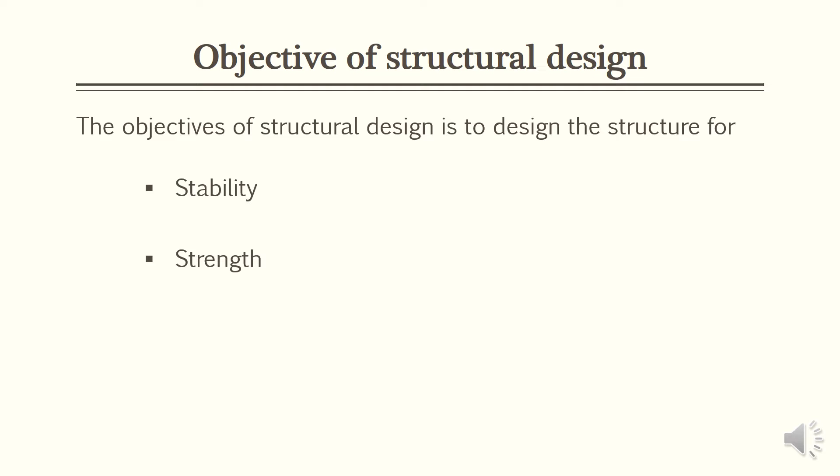The objective of structural design is the design of structure for stability, strength, serviceability, and finally economy. The design of structure should satisfy these four requirements.

Stability prevents the overturning, sliding or buckling of the structure under the action of external loading. Strength is the ability to resist the stresses induced by the load in various structural members.

Serviceability is satisfactory performance under service load conditions, which implies providing adequate stiffness and reinforcement to contain the crack width and vibration within acceptable limits. It also provides impermeability and durability.

Finally, economy - it is indeed a challenge and a responsibility for the structural designer to design a structure that not only has a good appearance but also strikes the right balance between safety and economy.

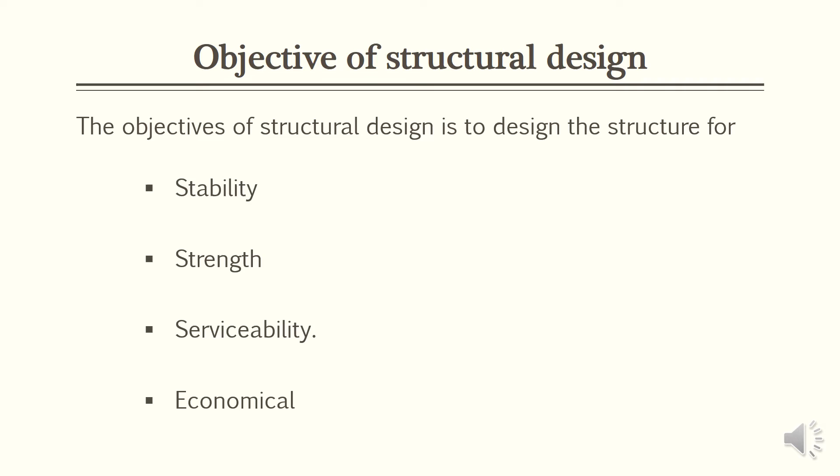Steps involved in RCC structural design process. The entire process of structural planning and design requires not only imagination and conceptual thinking, but also sound knowledge of practice and practical application.

Design of any structure is categorized into two main types. The first one is functional design, the second one is structural design. We have to see the functional design and structural design briefly.

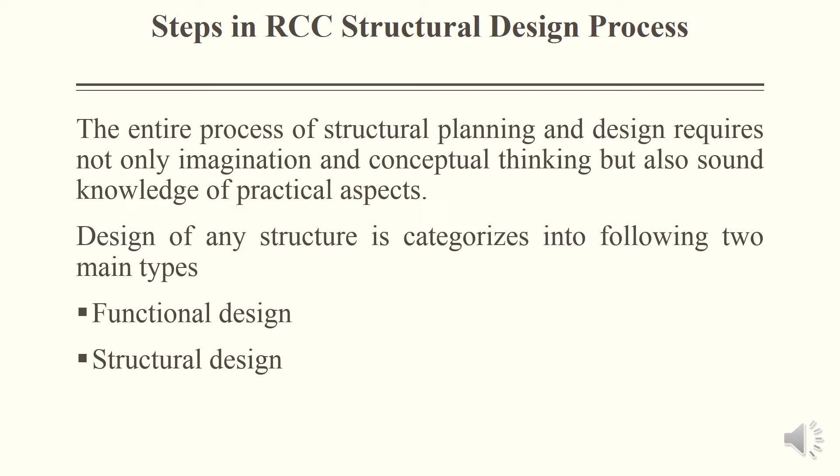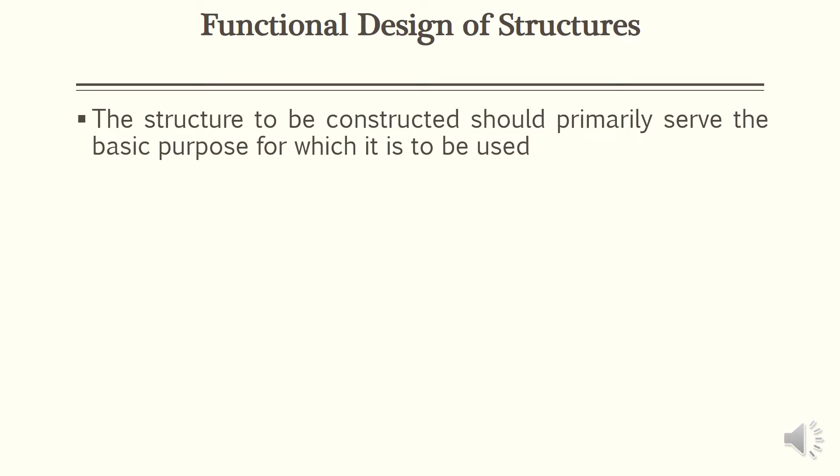The functional requirement of design of structures: the structure should be constructed to serve the basic purpose for which it is to be used. It should have a pleasing look, and a happy environment inside as well as outside.

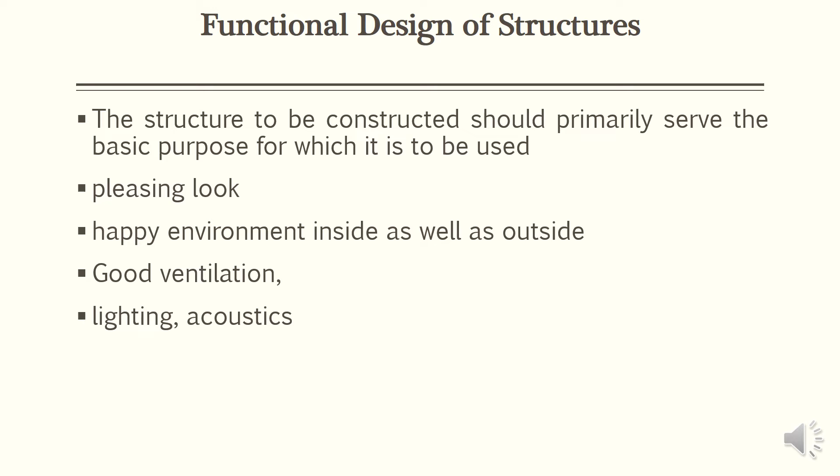It has good ventilation property. Lighting and acoustics should be provided in a proper manner. For community halls as well as cinema theatres, it should have an unobstructed view. These are the basic functional requirements of the structure.

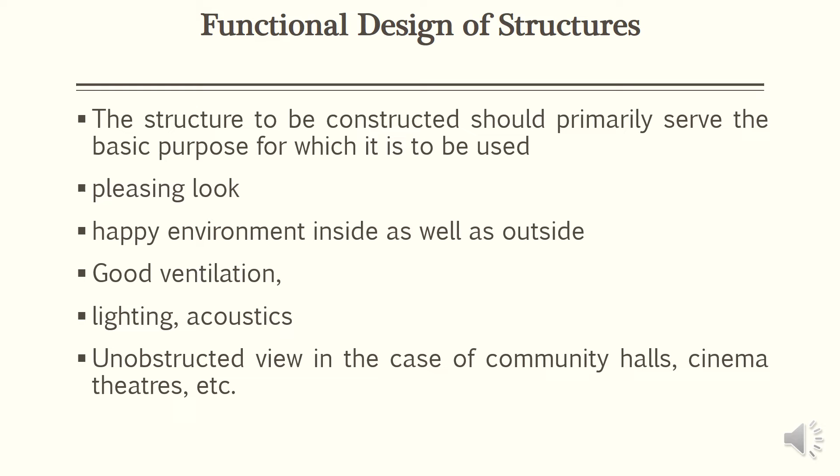Structural design is an art and science of understanding the behavior of structural members subjected to loads and designing them with economy and elegance to give a safe, serviceable and durable structure.

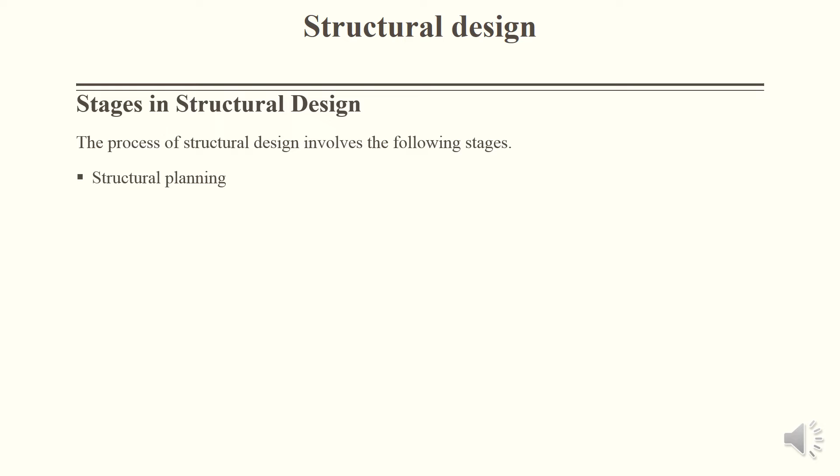The stages of structural design. The process of structural design involves the following stages. First one is the structural planning.

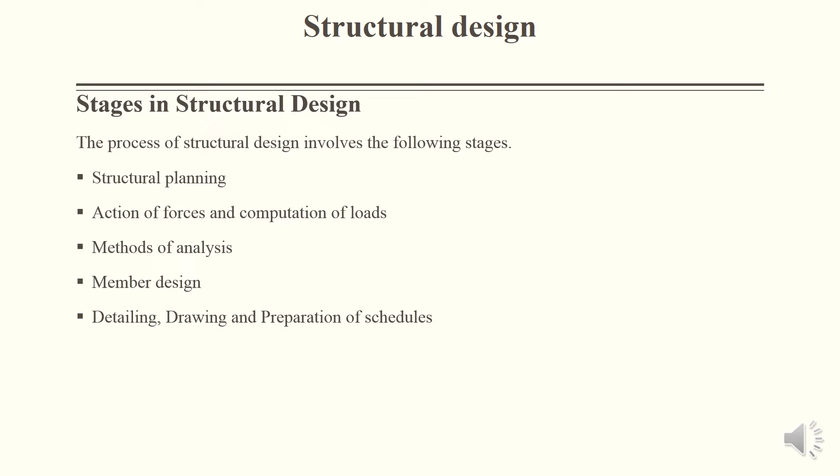Second is the action of forces and computation of loads. Third is method of analysis. Fourth one is design of members. Finally, detailing, drawing and preparation of schedules.

The types of load on structure and loading combination. Indian Standard Code IS 875 1987, Part 1, Part 2, Part 3 and Part 4 - the minimum design load for building and other structures - specify various design loads for a building and the structures.

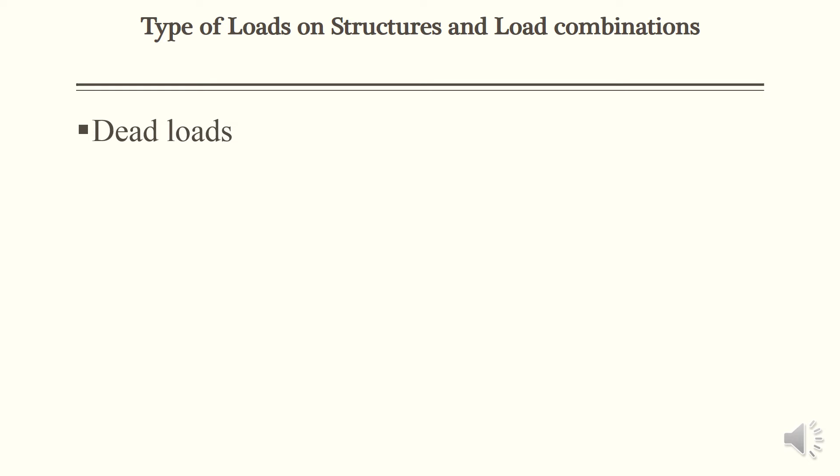The types of load acting on the structures are dead load or the self weight of the member, imposed load or live load, wind load, snow load, earthquake load and special load. These are the loads that normally act on any structure.

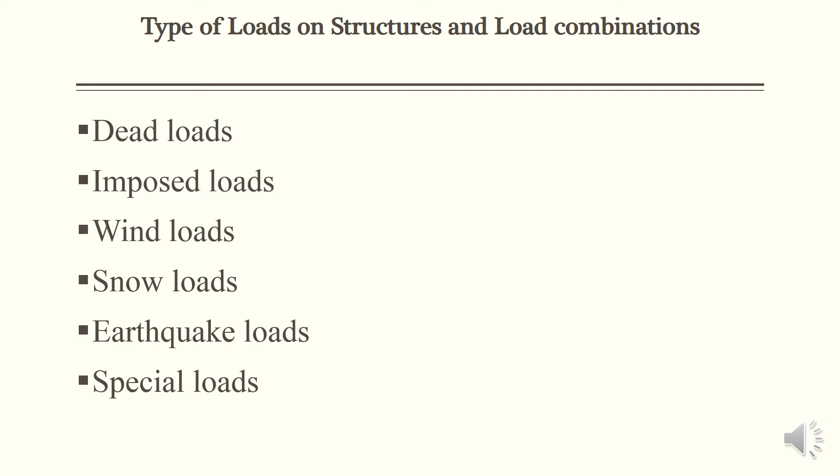Let us discuss the loading one by one. First one is the dead load. The first vertical load that is considered is dead load. Dead loads are permanent loads which are transferred to the structure throughout the lifespan.

The calculation of dead load of each structure is done by the volume of each section multiplied by the unit weight. The unit weight of common materials is presented in the table.

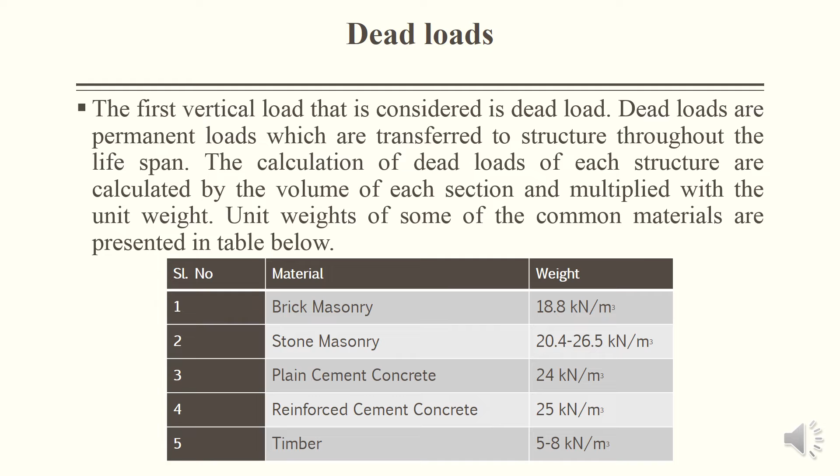For brick masonry, the weight is 18.8 kilonewton per meter cube. For stone masonry, it is 20.4 to 26.5 kilonewton per meter cube. For plain cement concrete, it is 24 kilonewton per meter cube. For reinforced concrete, 25 kilonewton per meter cube. Timber has a weight of 5 to 8 kilonewton per meter cube.

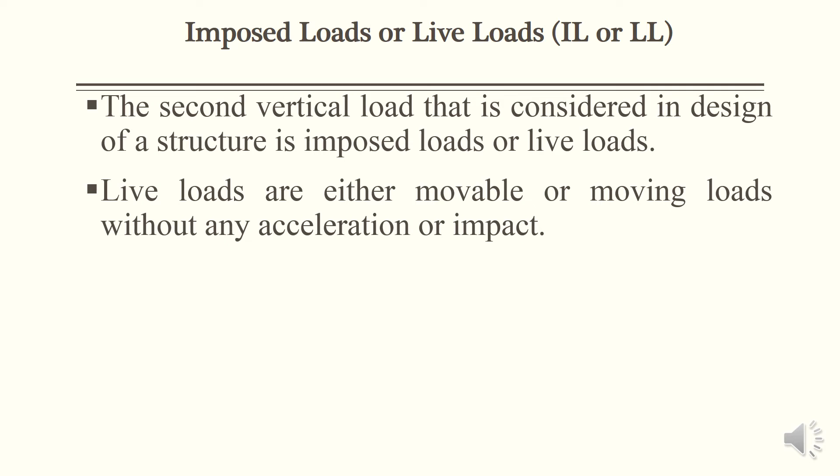Next is live load or imposed load. The second vertical load considered in design of structure is imposed load or live load. Live loads are either movable or moving loads without any acceleration or impact. The minimum value of live load to be assumed is given in IS 875 Part 2 1987. It depends upon the intended use of the building.

Next one is the wind load. Wind load is a primary horizontal load caused by the movement of air relative to the earth. The calculation of wind load depends on two factors - first is the velocity of wind, and next is the size of the building.

The complete detail of calculating wind load on the structure is given by IS 875 Part 3 1987. The design wind velocity Vz is calculated by the expression Vz equals K1 into K2 into K3 into Vb.

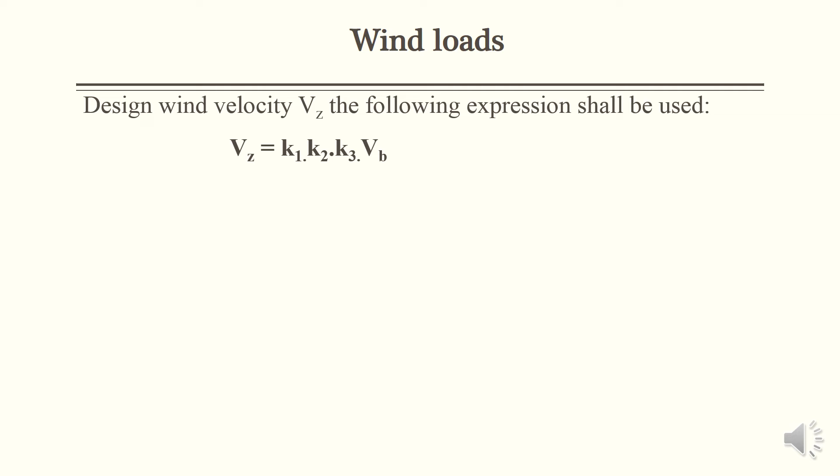K1 is the risk coefficient, K2 is the coefficient based on terrain and height of the structure, K3 is the topography factor - these are found from IS 875 Part 3. The design wind pressure is calculated by Pz equals 0.6 into Vz square.

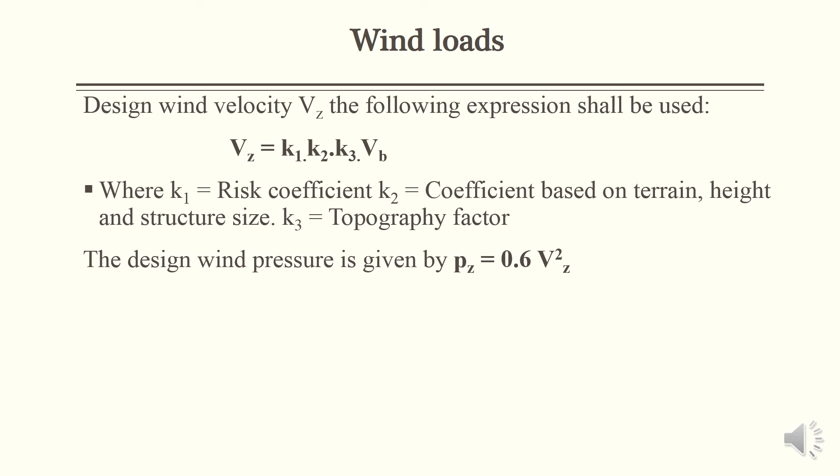Next is snow load. Snow load constitutes a vertical load on the building, but these types of loads are considered only in snowfall places. IS 875 Part 4 1987 deals with the snow load on the roof of the building.

The minimum snow load on the roof area or any other area above the ground which is subjected to snow accumulation is obtained by the expression S equals mu into S naught, where S is the design snow load on plan area of the roof, mu is the shape coefficient, and S naught is the ground snow load.

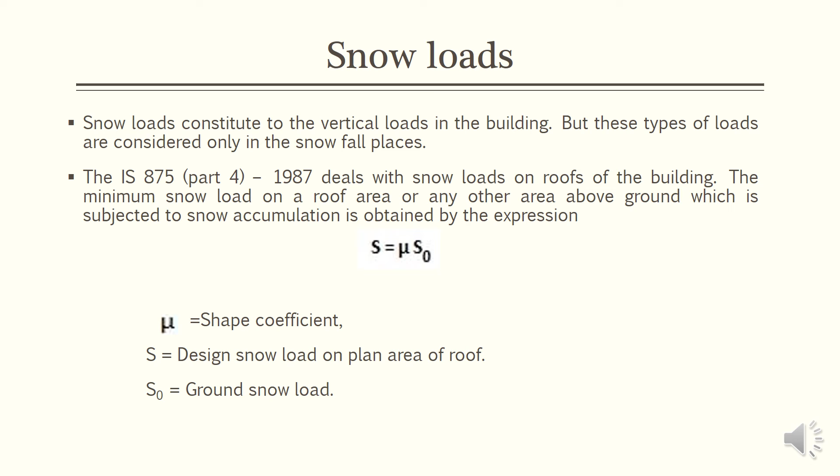Earthquake forces constitute both vertical and horizontal forces on the building. The total vibration caused by the earthquake may be resolved into three mutually perpendicular directions, usually taken as vertical and two horizontal directions. The vertical direction does not cause forces in the superstructure to any significant extent.

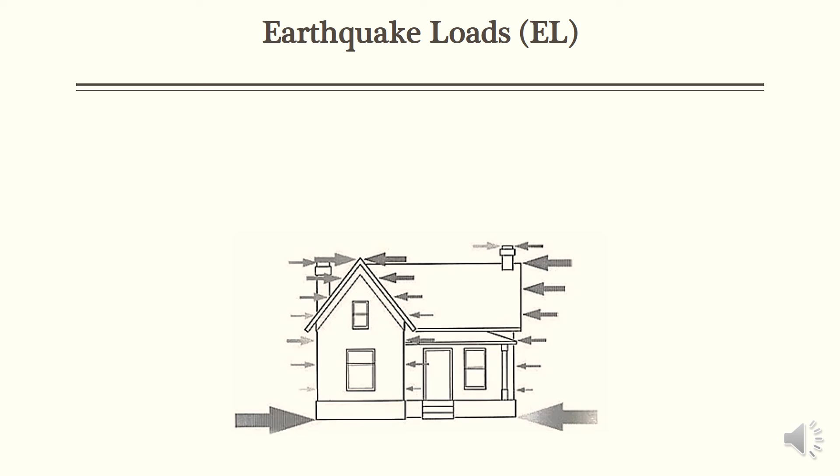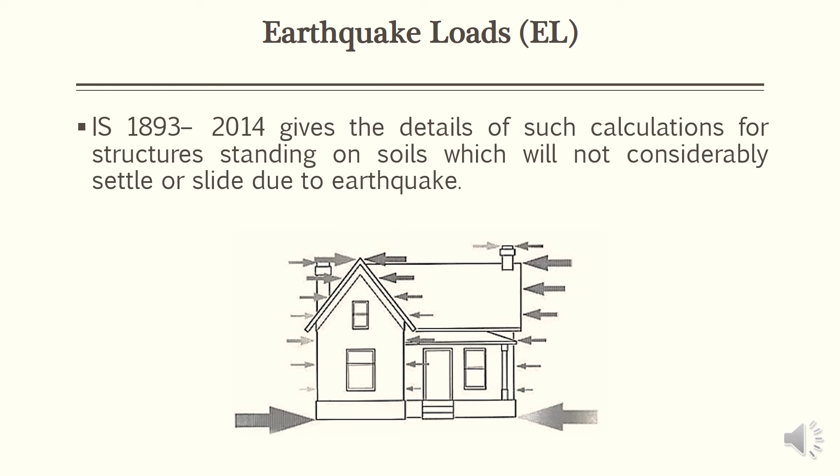But the horizontal movement of the building at the time of earthquake is to be considered while designing. IS 1893-2014 gives the details of such calculation for the structure standing on soil which will not considerably settle or slide due to earthquake.

Apart from basic loads, some other loads also act on the structures, like foundation movement, elastic axial shortening, soil and fluid pressure, vibration, fatigue, impact and erection loads.

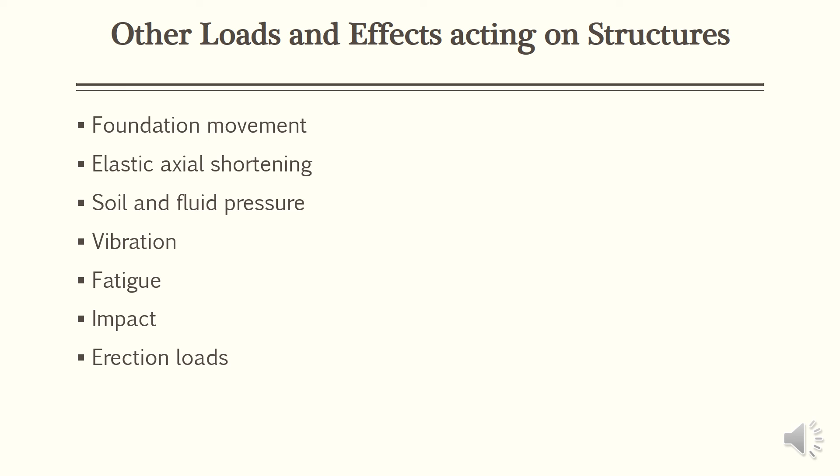Loading combination: a combination of loads occurs when different types of load act on the structure simultaneously or together. To avoid failure in a structure, a load factor is to be used in case of combination of loads acting on a building. In the codal provision, IS 456-2000 gives clear loading combinations based on which the structure should be designed.

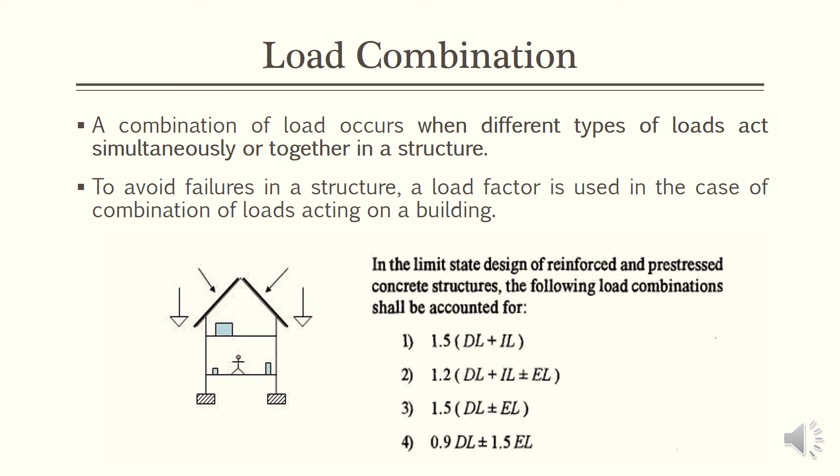We have to find out that loading combination. The design should be done for the worst loading combination. That is the procedure we normally follow for the design of structure. Thank you so much.